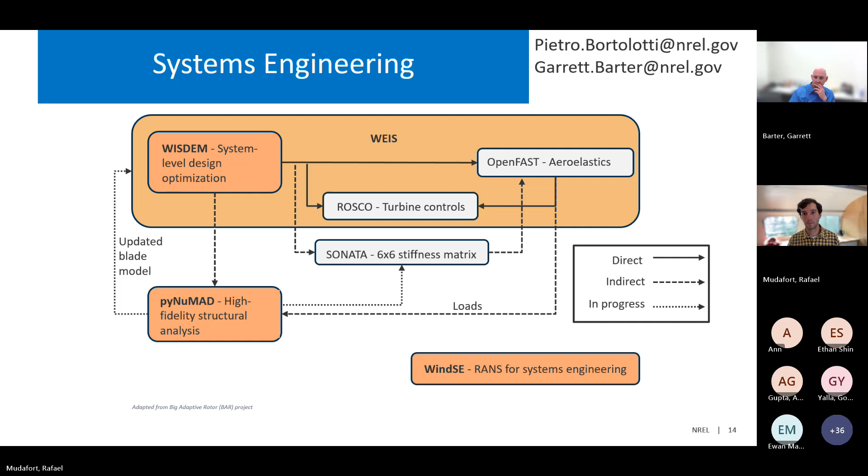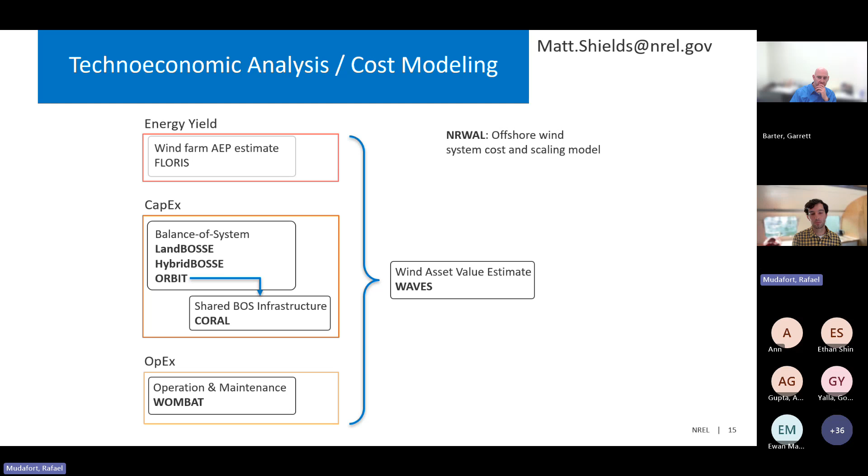And then finally, NRWAL over on the top right is a library of cost equations for offshore wind farms that also integrates with some of the other cost models. So it uses the other cost models to develop the cost equations that are embedded within NRWAL.

Going to wind farm controls and analysis, these are mostly related to characterizing and improving the energy yield of a wind farm. FLORIS is a steady state wind farm wake modeling software. It's very low fidelity, but also cheap to run and highly tunable to existing data. Its core capability is to estimate the energy yield of a wind farm given a set of wind conditions, and this is often used to optimize a wind farm layout or design a wind farm control strategy to mitigate wake losses.

And it was specifically created to identify various kinds of operational losses. So within the repository, there are examples of doing this sort of operational loss assessment using open data sets.

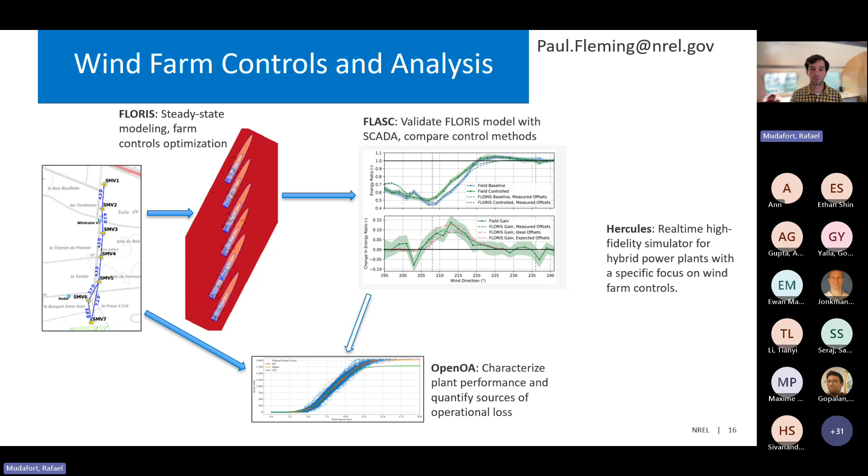Now getting to the OpenFast collection of tools, there's of course OpenFast along with a set of adjacent tools that enable using OpenFast effectively. OpenFast itself is a multi-physics, multi-fidelity whole turbine simulator for the coupled dynamic response of wind turbines. The OpenFast software contains distinct modules for aerodynamics, hydrodynamics, control and servodynamics, and structural dynamics. And it also supports modeling a variety of turbine architectures, including floating offshore wind turbines.

OpenFast also includes its own basic wind turbine controller, but the ROSCO package, which is the reference open source controller, is a full-featured baseline controller and includes a generic tuning process for new wind turbine models.

And finally, the OpenFast Toolbox is a Python package that has a large number of utility functions for working with OpenFast and FastFarm. This is essentially just a collection of pre- and post-processing tools that have been useful to us, the researchers at NREL, and so we've been making them available here.

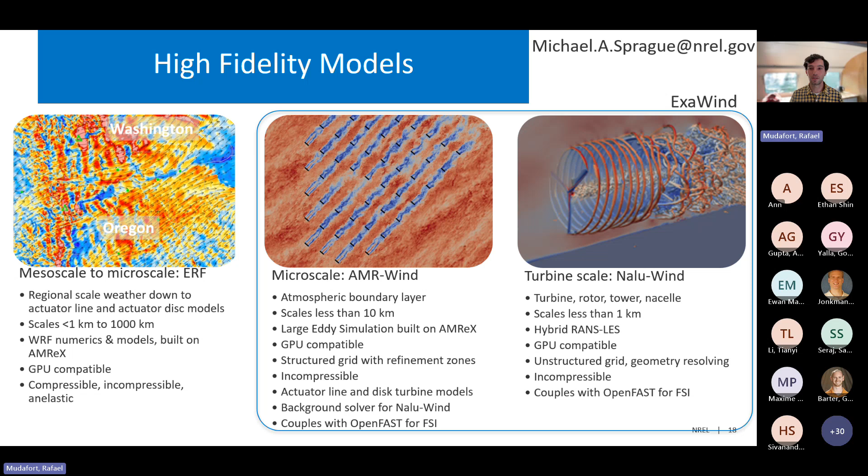My name is Mike Sprague. I'm the PI for the ExaWind project and the High Fidelity Modeling project that has been supporting ExaWind. I'll talk a little bit more about that in a moment.

I'm going to go over some of the key high-level aspects of ExaWind, and then I'm going to hand it off to Marc Henry de Frahan and Jon Rood. I think those are the two who will be following me, and Michael Kuhn will be talking in detail about AMR-Wind.

So what is ExaWind? You heard a little bit of this from Raph already. So this is an open source suite of codes really designed for high fidelity, but also mid fidelity modeling and simulation of wind turbines and wind farms.

When we talk about ExaWind, we're really talking about the two CFD codes, our physics-based solvers, NALU-Wind and AMR-Wind. But anytime that we're going to be simulating a wind turbine in this stack, we need a turbine model, and right now that is OpenFAST. That's a key component to the whole stack and running wind turbine simulations. We are now developing OpenTurbine, which is a new turbine simulation code, really designed specifically for our CFD tools. I'll be talking about that as well.

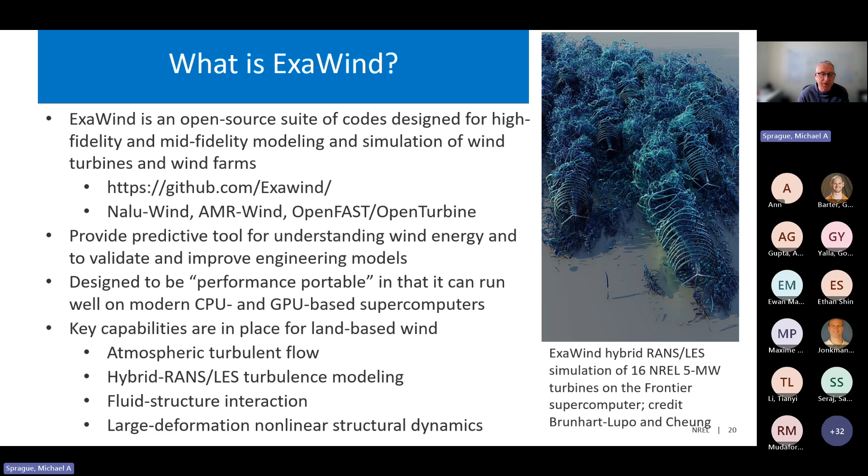I think there is some confusion out there about the relationship between ExaWind and its underlying CFD solvers, Nalu-Wind and AMR-Wind. Both Nalu-Wind and AMR-Wind can be run in standalone mode. If you're running what we call mid-fidelity type actuator line or actuator disk simulations, you might just be running AMR-Wind alone. But if you're going to run high fidelity aerodynamic simulations of a blade section or a blade, that might be Nalu-Wind alone. But if you're going to be running a geometry resolved simulation of a wind turbine, you would be using the full ExaWind stack, which is Nalu-Wind and AMR-Wind.

And this is a very simple example here showing flow over a sphere. So this is effectively the same approach we use in a turbine simulation. We have some sort of body that we're resolving the flow around, in this case a sphere. The mesh immediately surrounding the body is a Nalu-Wind unstructured grid mesh, where we resolve the boundary layers and have typically a hybrid RANS LES turbulence model. We have the TIOGA library, which provides our overset coupling capability. And Nalu-Wind is then in turn coupled through the overset meshes to the structured mesh AMR-Wind background solver, which is our large eddy simulation solver.

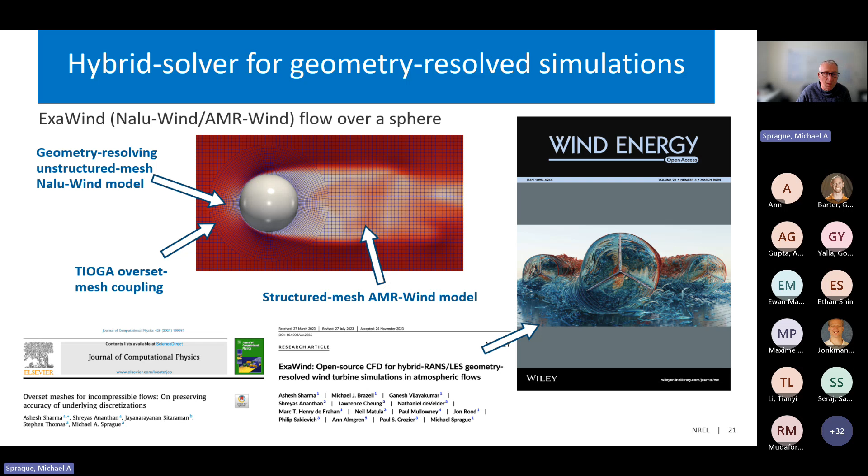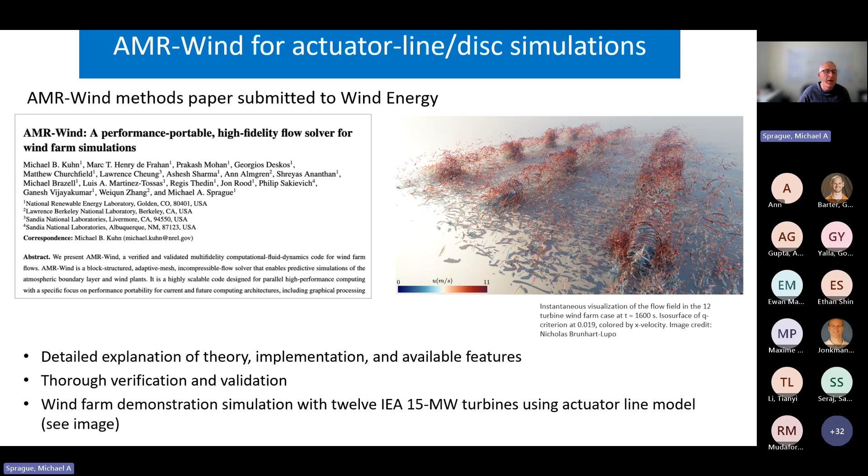You can read about this. We have a couple of papers. The 2 papers I reference here were led by Ashesh Sharma and a bunch of others, and one was on the cover of Wind Energy. We are in the process of hopefully publishing a paper on AMR-Wind that describes all of the details of AMR-Wind, a very detailed explanation of the theory, implementation, features, our verification, validation, and some of the demonstration simulations therein. So that's under revision right now. Michael Kuhn, Marc T. Henry de Frahan are leading that effort. Hopefully we will be able to get that published soon.

I want to acknowledge the funding and the many developers that have taken part in ExaWind. The funding for ExaWind started in 2016, and that was basically jointly funded between the Wind Energy Technologies Office, who are still funding the project, and the Department of Energy's Exascale Computing Project, which was a large contributor to the code. That also started in 2016 and ended in 2024. We now have new funding under the Department of Energy's Office of Science through the Floating Offshore Wind Energy Earthshot Research Center. That started in 2023, and that will go as a 4-year project.

There are other development activities happening out there. I'll do a quick call out. We have a nice partnership with Total Energies. We're developing capabilities there as well.

Status and outreach. So again, I would say we have solid capabilities in place for both high and mid fidelity simulations of wind turbines and wind farms, land-based. We are still doing active development right now. We're trying to improve the performance, robustness of the system.

We are developing and coupling to OpenTurbine, and we have implemented two-phase fluid dynamics for floating offshore wind. We're working on validating those capabilities in 2025. If you go to our ExaWind organization page on GitHub, you'll see that we've put up the benchmark repository. This has been going on in this last fiscal year and will be a big activity in the upcoming year.

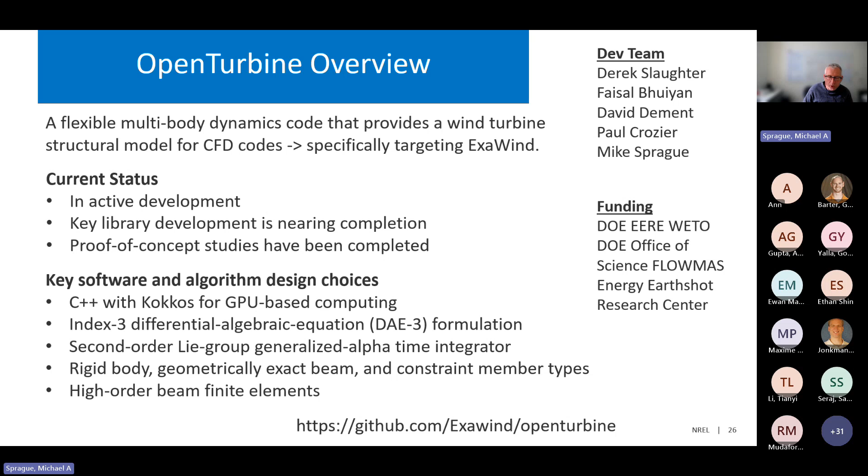The element types in this first round are going to include rigid body elements, geometrically exact beam elements, and constraint member types. We have high order finite elements, very similar to those in BeamDyn. You can track our progress on GitHub under the ExaWind organization, and we have the OpenTurbine repository.

Just wanted to share some of the progress and some of our proof of concept studies. We've implemented the IEA 15 megawatt turbine in OpenTurbine. And one of our first test cases was just to do the dynamic simulation of the rotor under fixed RPM and under gravity load, so no fluid dynamics.

And we compared OpenTurbine in this proof of concept form with very similar OpenFAST models, but in the standard loose coupling form that you find on the repository, and the new tight coupling version of OpenFAST that Derek Slaughter and Jason Jonkman and others are working on.

So there's two big takeaways here for OpenTurbine versus OpenFAST in these two forms. We can get a much larger stable time step with OpenTurbine compared to both the tight and loose coupling. And the tight, though, is substantially bigger than the loose coupling in OpenFAST. Our time to solution is also significantly faster than both of the OpenFAST versions.

We're very excited about this. We've been pushing very hard on making this as fast as possible. We use sparse direct solvers, for example, and it's all GPU compatible. Though I'll point out that all these comparisons were done on CPUs, and the same CPUs at that.

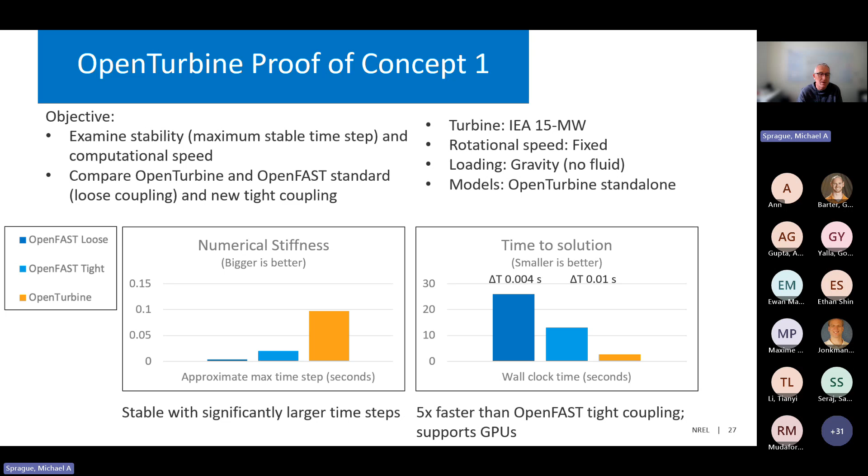In our second proof of concept study, we coupled OpenTurbine to AeroDyn for BEMT simulations with unsteady aerodynamics, also the ROSCO controller. So we did a case of the 15 megawatt turbine again, where we are simulating a wind gust going from 11 meters per second to 20 meters per second with pitch control active.

Some notable things: we couldn't get this to solve in the standard loosely coupled OpenFAST version, but the tightly coupled version was able to solve that problem well. OpenTurbine was also able to solve that problem successfully, and we were able to get very fast simulations out of OpenTurbine, which was pretty exciting.

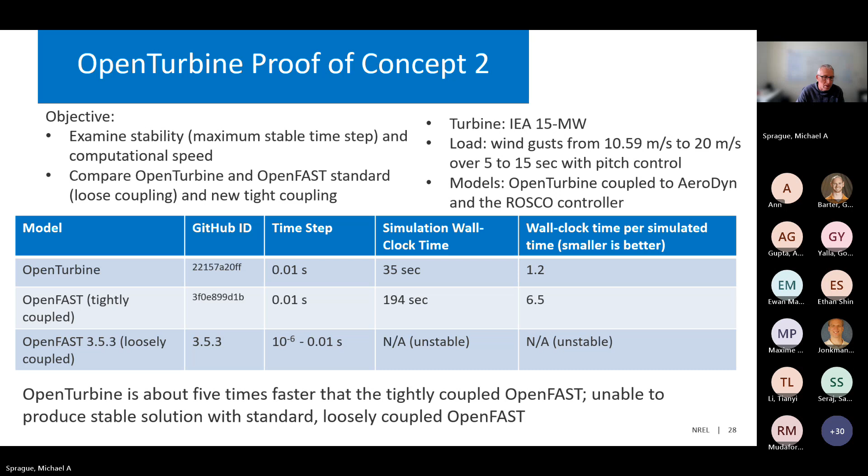Next steps: we're generalizing our implementation, very much focusing on horizontal axis wind turbines and floating rigid bodies. We're creating an interface for input using the WindIO turbine definition. We're implementing an application programming interface for fluid structure interaction, focusing again very much on ExaWind, and that will be for Nalu-Wind and geometry resolved simulations and AMR-Wind for actuator line simulations. Our goal is to release the production version late summer 2025.

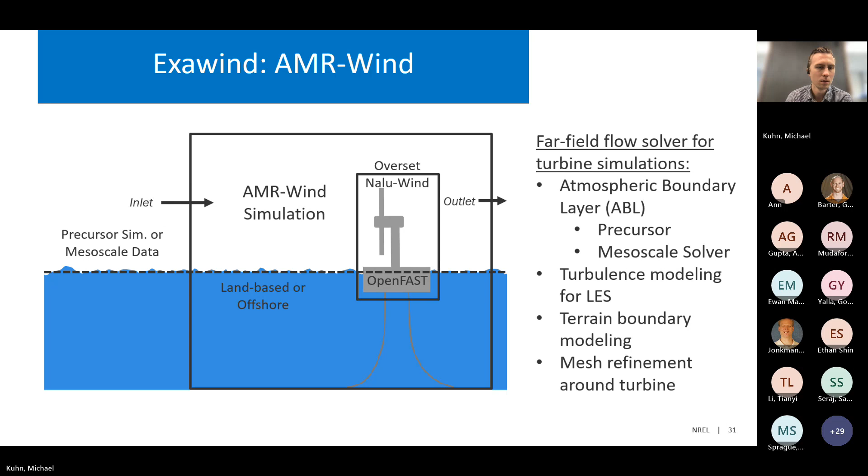So that's where AMR-Wind comes from and where a lot of the development comes from. But because of those capabilities, we have an opportunity as well as a focus to be a useful tool for the whole wind energy research community. And so there end up being a lot of other applications outside of just geometry resolved simulations.

So this is the general framework of AMR-Wind, where we have turbulent inflow, the capability of having a turbine model, and also different types of lower boundary models. On the turbine modeling side, many of these models are coupled with OpenFAST. Some of the key things that OpenFAST provides are the structural modeling as well as the controller. There's a lot of research content and usefulness coming from OpenFAST there.

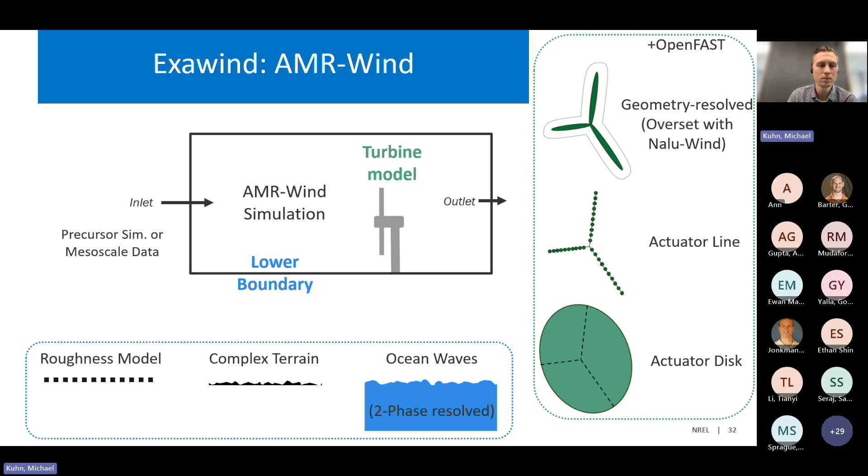On the turbine modeling side, when coupled with Nalu-Wind through an overset solver, we can do geometry resolved simulations, but we also have the capability to do actuator line and actuator disk simulations within AMR-Wind without coupling to another solver. Concerning the lower boundary, most of the time we represent that through a roughness model, but we also can represent complex terrain and have ocean waves, which are two-phase resolved waves. Phase referring to we actually have liquid and air in the CFD solver.

So a bit on the theory and what we're doing physically for the CFD solver. Primarily, most simulations are run as incompressible constant density, and buoyancy is represented through the Boussinesq approximation. We also have available single-phase anelastic and two-phase incompressible.

For modeling turbulence in the bulk, primarily we are using an LES framework. We have multiple options for turbulence models there. And then we also have a Monin-Obukhov representation of the lower boundary. This is available both in the context of a flat boundary or complex terrain. There are a few RANS models available as well, but I won't go into detail there.

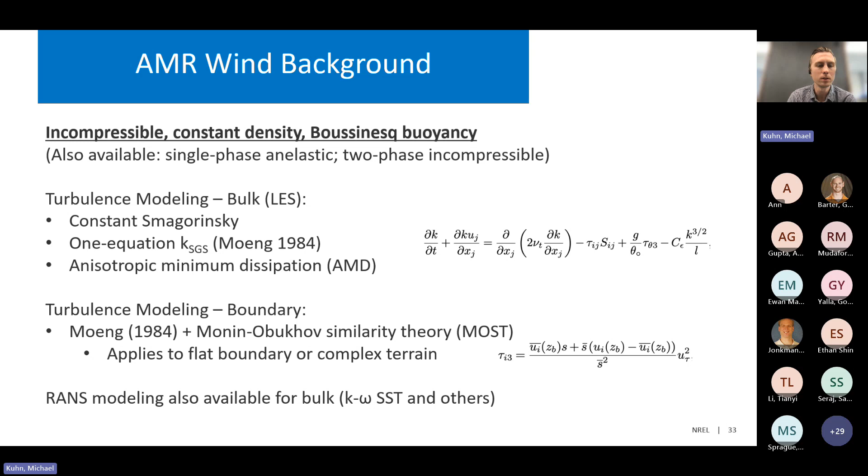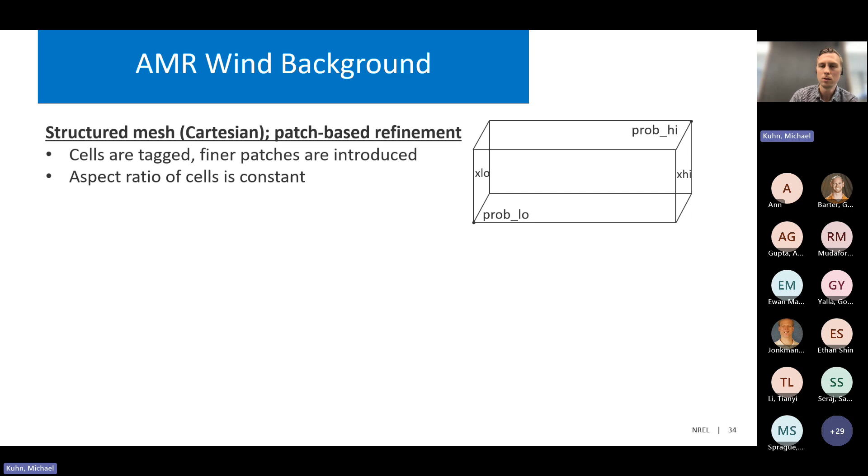So how does AMR-Wind represent a flow, and what does the domain look like? This is a structured mesh approach. So it's a Cartesian mesh, and it has the ability to perform patch-based refinement through AMReX, which AMR-Wind is built upon. And how that works in terms of refinement is cells within the domain are tagged, and then refinements are introduced in those areas of the domain.

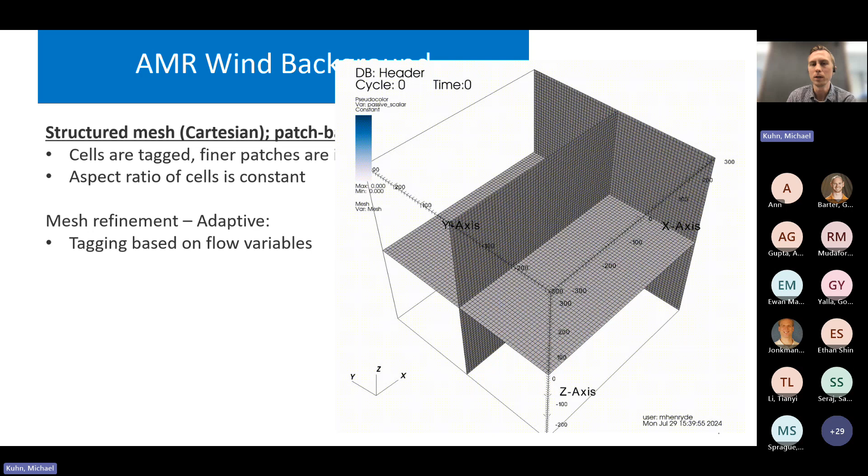So you can see animation here, where we have adaptive mesh refinement active. Based on quantities in the flow, we can tag cells, which then become finer, and that continues to update as time goes on. So this is something that we can use if we want to track wakes or something like that and have the refinement follow the wake.

We also have static mesh refinement available, which is the primary mode of mesh refinement that I would say most users of AMR-Wind are applying. And this is based on geometric sections. Essentially, if you know where you're putting the turbine, you can estimate where you're going to need a finer mesh and apply that. So this is a figure. This isn't the actual mesh, but this represents how you would select regions, tag those, and then AMR-Wind would introduce finer meshes.

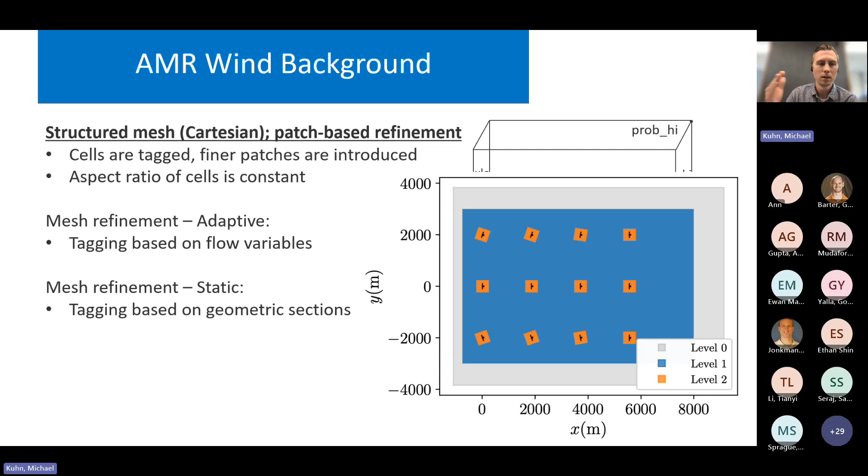And we also have a tool which is on the ExaWind organization if you go to GitHub, but this tool is its own repository. So this is a front-end tool which has both a GUI and a Python interface to set up input files. The input files for AMR-Wind are very simple and direct, but if you're doing a lot of turbines, a lot of refinements, it really helps to have a tool like this.

Okay, so I'll go into some more detail about the turbine models. Concerning actuator line, this is linked with OpenFAST exclusively at the moment. And in this case, the required mesh resolution depends on the epsilon scale of the turbine model, and it can be a little more restrictive in terms of the time step. But you're actually capturing a lot more than many other models. So it's kind of the best case scenario without resolving the geometry directly. And we have a few things within AMR-Wind which can make this even more effective or more cost effective. We also have actuator disk method, which can be either run with OpenFAST or without.

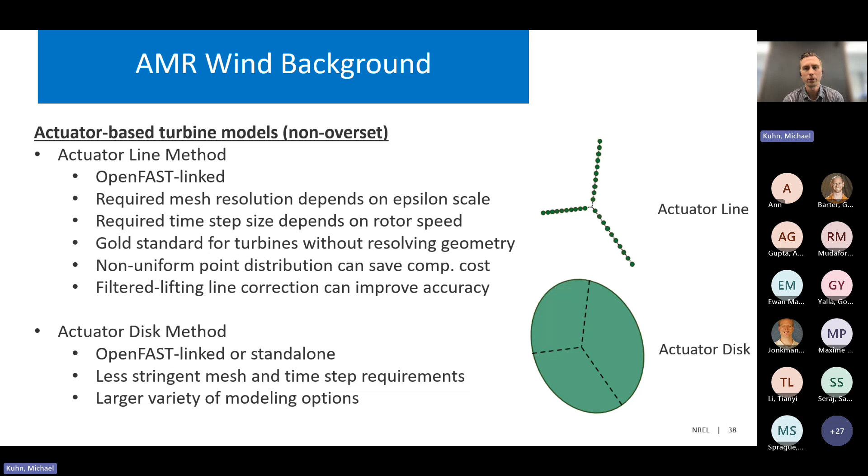So if you're coming to AMR-Wind, what do you need to bring to be able to do a study well? You have to start with having target flow conditions. So that can be as simple as a constant flow profile, or you have some type of thermal stratification that you want, or target velocity at the wind turbine. And you can set up a precursor simulation, which will generate an ABL, and that will become the inflow for a turbine simulation.

Furthermore, you have to know what type of model you want to use for the turbine. If you are trying to keep it as simple as possible, there are standalone models within AMR-Wind. You also have the opportunity to link with OpenFAST and do things with a lot more detail. So there's also the turbulence modeling side of things, where there's a few options that you can choose, and then having sufficient computational resources. Because these are high fidelity codes, they're not the cheapest models out there to run. However, depending on the modeling choices that you take, things can be more or less expensive.

We have a walkthrough tutorial on the AMR-Wind documentation, and that can actually be run, albeit a little bit slowly, on a laptop. But in general, most of the research-related work, the high-value simulations, will require significant computational resources.

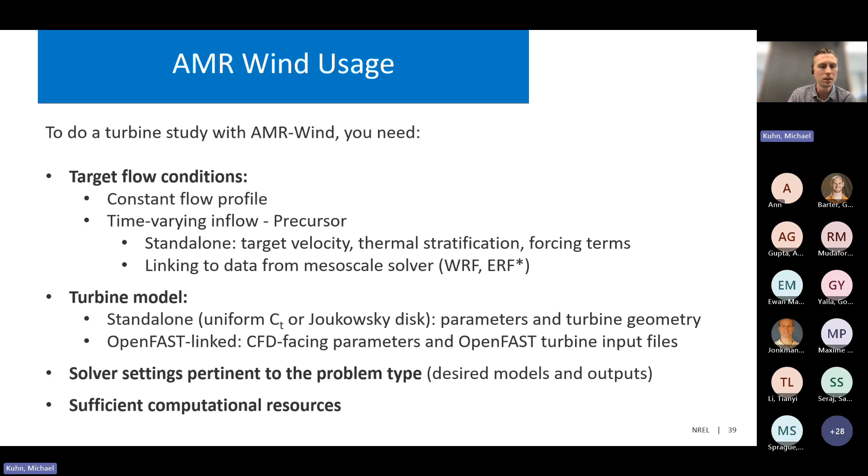And then what do you actually get from this? So there's a variety of ways to characterize the flow that you get from AMR-Wind. Since it's a CFD solver, we have ways that you can sample the flow and directly get data in a format that you would like to be able to post-process. And then also all of the information that you need from the actual performance of the turbines during the simulation.

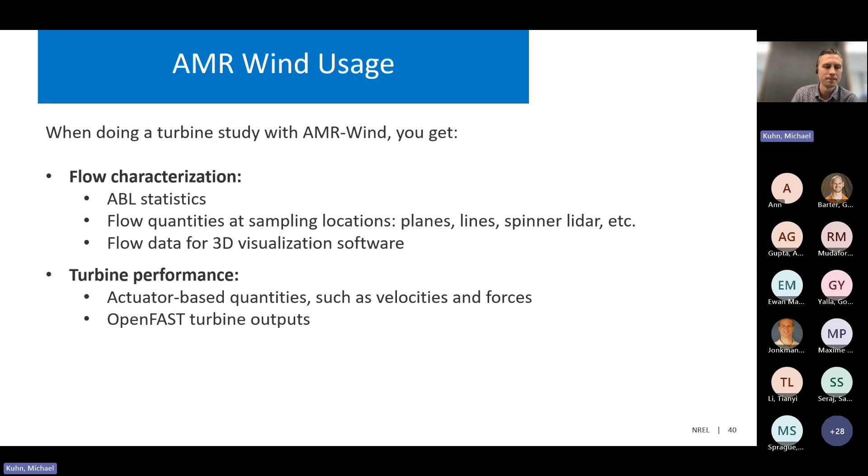So I'll just step through with my remaining time what we have out there if you want to understand what a workflow looks like for AMR-Wind. This is directly on the online documentation, and the three sections that comprise a typical AMR-Wind workflow. We show how to compile, and we have an actual tool that relies on Spack to make that as simple as possible for you. And then the precursor step, and then finally a simulation with actuator disks for turbines.

So what does compiling look like? It's completely up to you if you want to do it on your own and get the libraries together and just rely on CMake. No problem with that. But also we have a tool called ExaWind Manager, where it makes it very simple. After setting up ExaWind Manager, you set the appropriate environment variables and start it, activate Spack through it. And then you can choose what version of AMR-Wind you want, the desired options. There's specific features that you want to be compiled into AMR-Wind there, and then install, and it handles everything for you there.

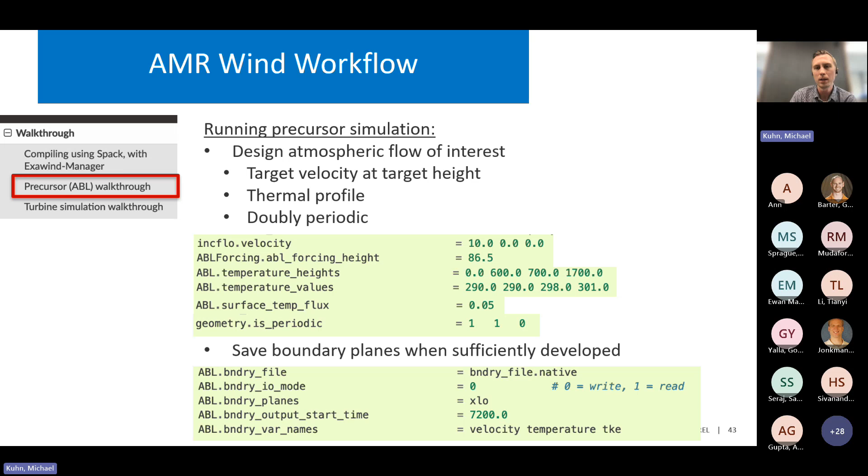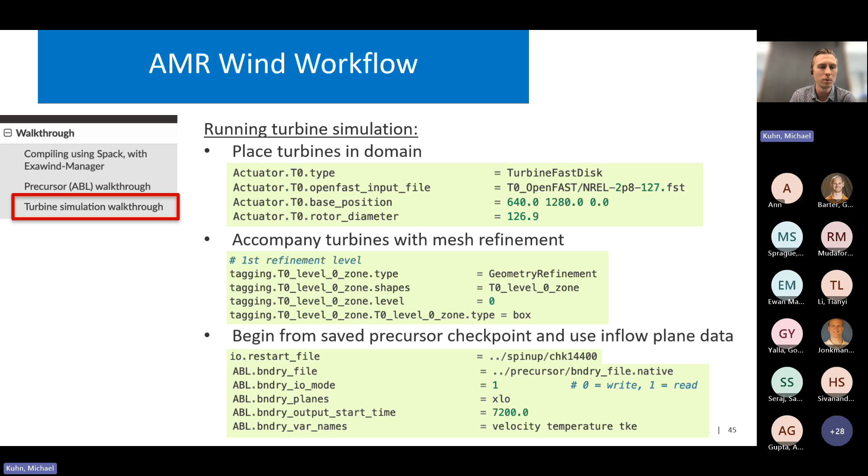All right, so I'll just mention we have a few things in active development. You can even see these as pull requests, but we have a lot on projects behind AMR-Wind right now. We have a lot pushing toward offshore wind modeling.

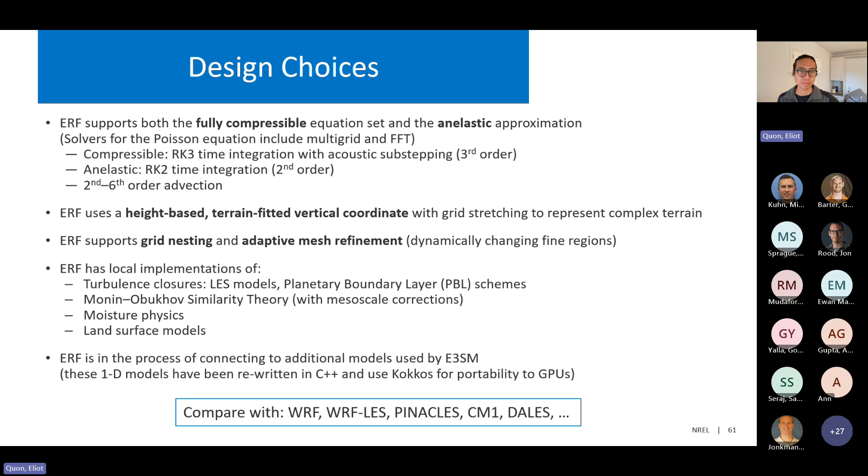In addition, we also provide adaptive mesh refinement and are in the process of developing an interface with the DOE global model called E3SM. I also want to hit on the fact that we're developing a code with modern software practices, so we also have continuous integration set up, similar to what's being done in AMR-Wind, as Jon Rood discussed.

So our plan is to support a variety of real world, real data simulation workflows. We can start with an existing WRF simulation and use that to drive ERF. We can use legacy WRF preprocessing tools, the WPS suite, to generate initial and boundary conditions for ERF. We can run ERF standalone, and then also use Python tools that we've been developing to drive ERF with a variety of large-scale data sets, such as the HRRR model. And work in progress is offline coupling with the E3SM global model.

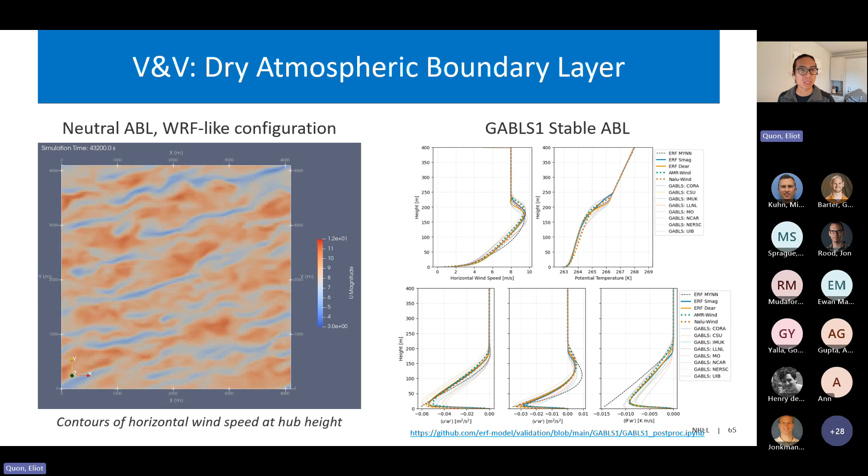I won't go into details for the sake of time. And then next up, we've looked at a convective case with moisture. So we're prescribing, in addition to surface sensible heat fluxes, we're also prescribing latent heat fluxes. We're also prescribing mesoscale tendencies in momenta, temperature, and total mixing ratio for water content.

And as with other codes and other work in this field, they've noted that these results are highly sensitive to numerics, especially as we increase our resolution and model fidelity. There's increased sensitivity, and it's a good time to revisit how we compare with other results that were obtained, say, 2 decades ago. But we're pretty happy with these results for this BOMEX case, which was quite challenging.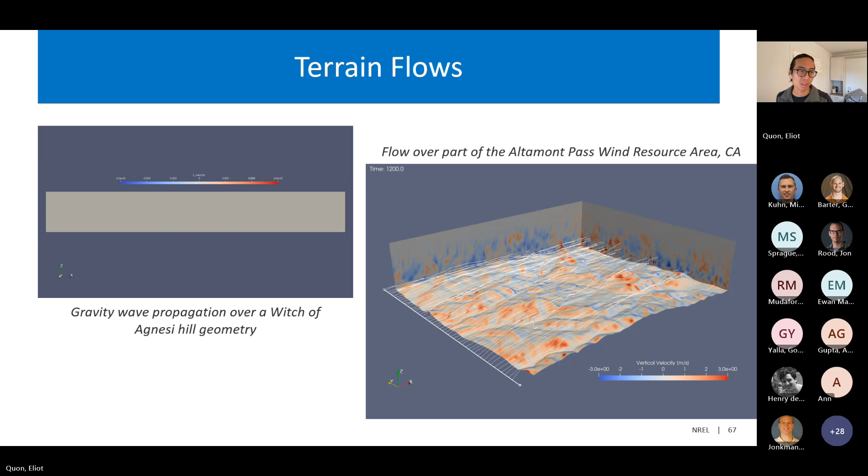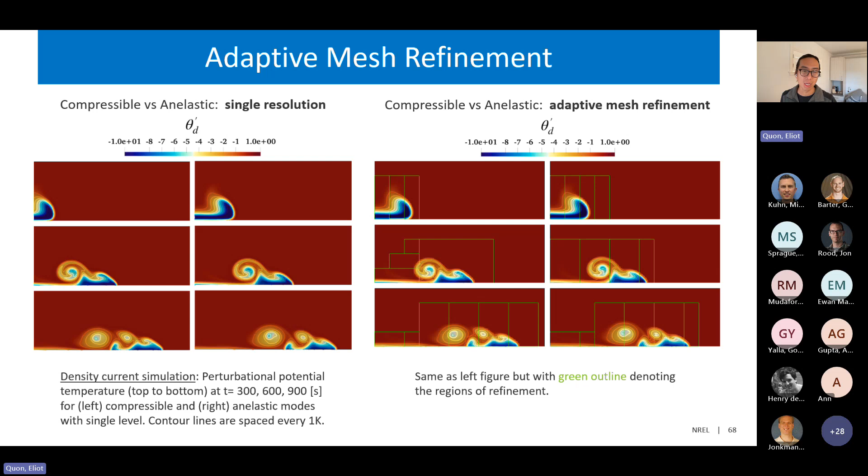So adaptive mesh refinements are provided by the AMReX library. Here we have a density current, which is a cold bubble case that we've run in both compressible and anelastic modes with single resolution, as well as adaptive mesh refinement on the potential temperature field. So this basically just says we get the same solution regardless of solver path.

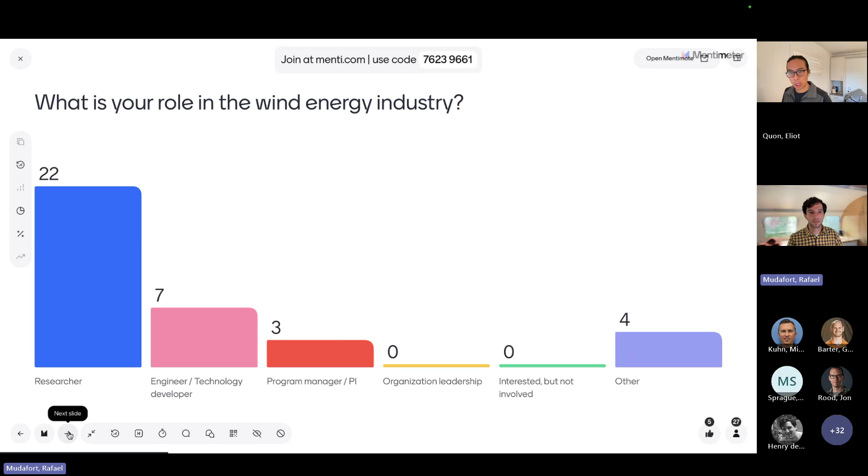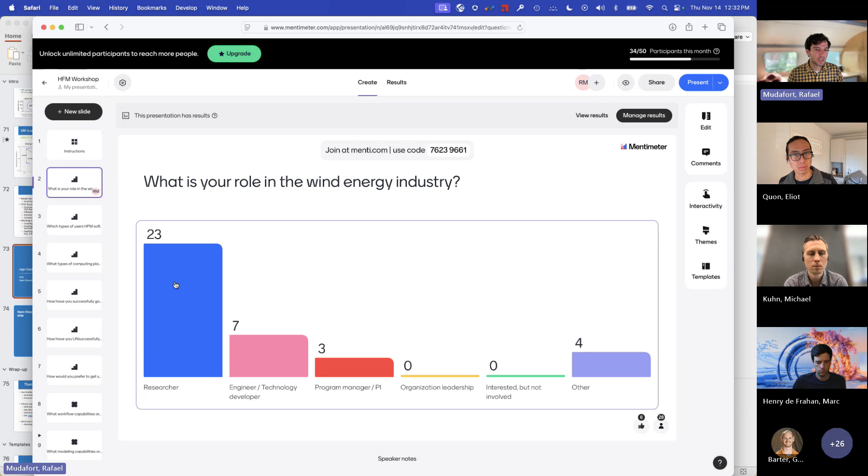I think what you said about self-selecting is correct. I think that's kind of what we target, at least in the ExaWind stacks. We're really focused on HPC. Yep. And you really want to be using those LES codes at HPC. So I think that makes sense to me. What is the practicality of ERF and or ExaWind on workstation use? Is that more just for developing your toy problem before going to HPC, or is there a practical use case on workstation?

That's typically how I've seen it done. You develop your case, you develop your code either on CPUs or GPUs on workstation. Yeah. But then you push that to CPU or GPU on HPC. For ERF, I think, yeah, that, and also, we can run ERF in a single column mode, depending on your region of interest. If you're just using the mesoscale model and a PBL scheme, and you're not downscaling to the turbulence resolving scale, then I think it's possible that a problem of interest could fit on a workstation.